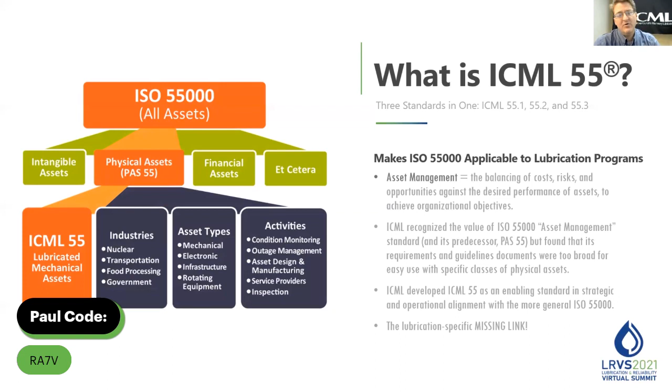So 55.1 is an enabling standard that serves kind of like the missing link between ISO 55000 and your plant's lubrication plan. It replicates the structure of ISO 55001, but focuses the verbiage to what will be practically necessary for lubricated assets.

Well, so at this point, maybe you're asking a few questions like, so what's in it? And is this really meant for do-it-yourselfers, DIY? Why use it at all? Couldn't I just Google for all this? That's the second time I've mentioned Google. And if I decide to proceed with the ICML 55.1 standard, what's next? And these are all important questions because you want return on investment for your purchase, right?

So real quick, ICML 55.1, like I said, patterned after the ISO structure, it's 3 documents. 55.1 is part 1, the requirements document. 55.2 is the guideline document, and 55.3 is going to be the auditor's manual to spell out how an auditor is going to become competent to go out and confirm compliance with the ICML 55.

So as the requirements document, 55.1 spells everything out of what is necessary for organizations to establish, implement, maintain and improve the consistent management of lubricated mechanical assets. Like I said, it's co-authored by a team of 45 experts from all over the world, but most importantly, it defines 12 interrelated areas of a successful, sustainable program.

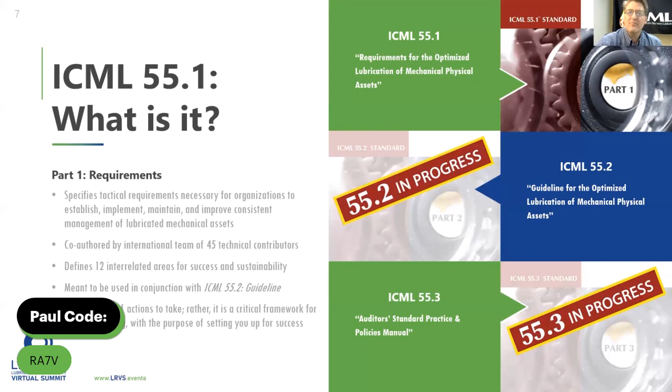Now, it's meant to be used in conjunction with 55.2, the guideline document, but we didn't need to publish them together. That's why 55.1 was published in 2019, because as you'll see here in the next few slides, there's a lot of preparation work that goes into getting everything up to speed at your facility and developing the plan. And then 55.2 will help explain how to implement the plan once it's in place. So it's not really a list of actions to take, but it is a critical framework for decision making. And it's going to set you up for success when it comes time to implement.

So what is 55.1 not? Well, like I said, it's not really an isolated solution. It can partially function that way, but it is really intended eventually to be side by side with the guideline document, ICML 55.2. And of course, it's still an enabling standard, so it's meant to be used as an enabler for ISO pursuits, but it's not meant to replace or compete with ISO documents. Like I said, it's not a how-to manual. It really defines what to do, but 55.2 is the one that really gets more into how to implement.

It's not a substitute for the hiring of certified practitioners. What that means is you're still going to need trained, competent, experienced, knowledgeable, certified people to proceed with this. You can't just hand the 55.1 standard to anybody at your shop and say, here, go forth and do this. You're still going to prefer to have certified people to pull this off.

It's not a mind reader. What that means is that ICML 55.1 is a framework. You still have to do the work to assess your circumstances and identify your priorities and limitations while setting your business goals, whether or not it's part of a larger organizational asset management plan. So that's what you bring to the table, you and your whole team. The book itself doesn't know what your situation is, so it can't tell you exactly what to do. This means, of course, that ICML 55.1 is not a haphazard list of best practices. It is structured with purpose to move you toward successful implementation.

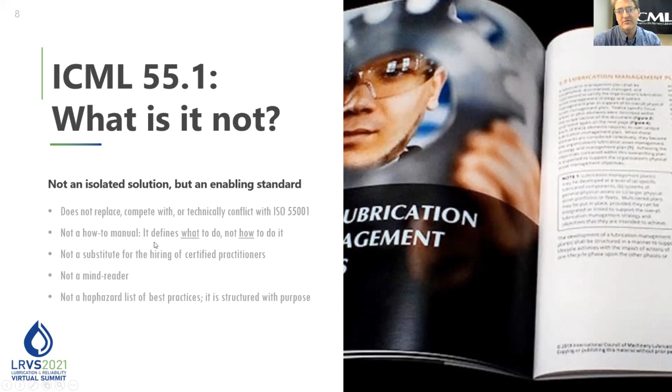So what were those 12 areas I mentioned? Here they are, the meatiest part of the structure. Let's look at all these areas in a little more detail, the attributes of the 12 areas. We don't have time to read through all the topics within the 12 areas. But at a high level, we're pretty much looking at Area 1, skills, that deals with personnel, training, and certifications. Area 2, machine design, accessibility, and use of monitoring technology. Area 3, lubricant design and selection.

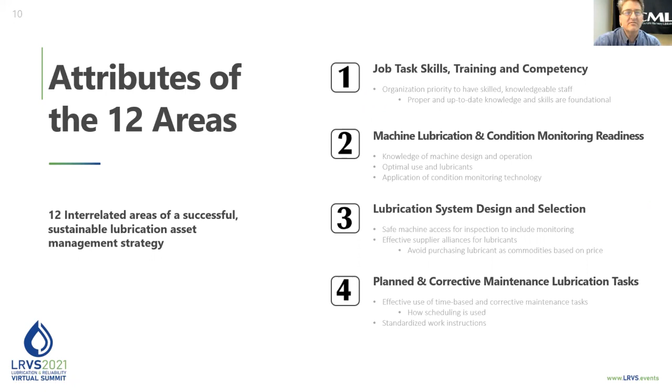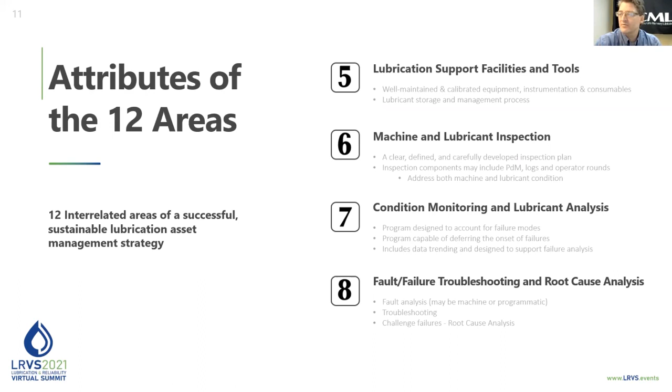Area 4, lubrication schedules and maintenance. Area 5, support facilities and tools. That includes storage like lube rooms and various other materials. Number 6, machine and lubricant inspection. Okay, that's monitoring and access. Number 7, lubricant analysis, kind of self-explanatory. Troubleshooting and root cause analysis procedures. Number 9, waste management, waste handling.

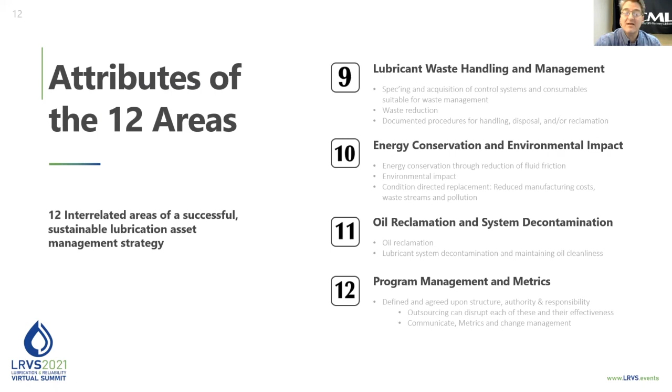Number 10, energy conservation. Number 11, reclamation and decontamination. So we're talking about end of life cycle kind of stuff there. And number 12 is the management of the lube program itself. So there is a lot of information and detail in this standard.

So a natural question is, can't I just Google for all this myself and not buy or follow the ICML 55.1 standard? Well, maybe yes, maybe no. Yes, you can, maybe, but you don't have to. We just happen to think that retracing all these steps would not necessarily be the best way to spend your time and money, right? Even though you can trust everything you read on the internet, right? I mean, really, you can trust everything you read on the internet, right?

Well, ICML is here to support you. So let yourself stand on the shoulders of giants now. The giants are your colleagues from around the world who put all this together for you. They've done all the work for you. No need to reinvent the wheel. No need to do it alone.

But at the same time, no, you really can't just Google all this after all, because the ICML 55.1 is more than just a collection of topics to be addressed. It's already structured to mimic the ISO 55001 as a decision-making tool. So it's already greater than the sum of any parts that you could maybe find on the internet.

Think about it. If you don't know exactly where to start and you don't know where to end, then how would you ever know that you've covered everything you need to be covering? At least with the ICML 55.1, you've got starting and ending parameters that you can work with, and it's structured for that comprehensive assessment and decision-making that leads to successful implementation.

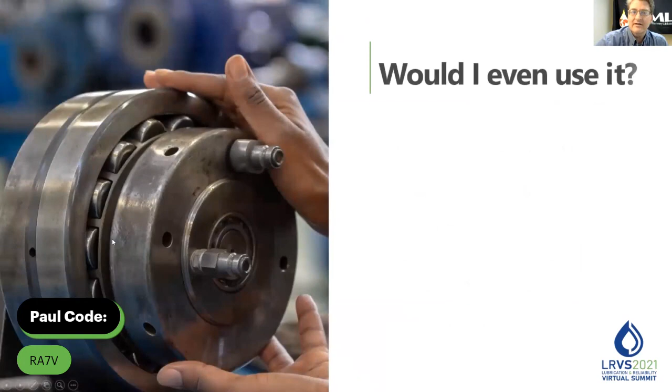Well, this is quite similar. If you decided to go out and Google for what you think is going to be covered in this book, then you're still going to wind up finding this standard on the ICML's website to be exactly what you're looking for. So I tell you what, in actual practice, you never know who's going to maybe benefit from this. The book was written for asset planners and asset practitioners at asset-rich businesses. Most everything's covered. Our website has a list of some of the fluids that are not covered.

But I tell you what, I've talked to certified MLA practitioners at conferences. I really enjoy talking to people at conferences, see what they're doing. And this one gentleman was telling me he was tasked with developing complete lubrication and oil analysis management programs from scratch. He was an MLA2. I mean, talk about pushing the edge of the certification envelope, because the MLA2 certification wasn't necessarily designed for that.

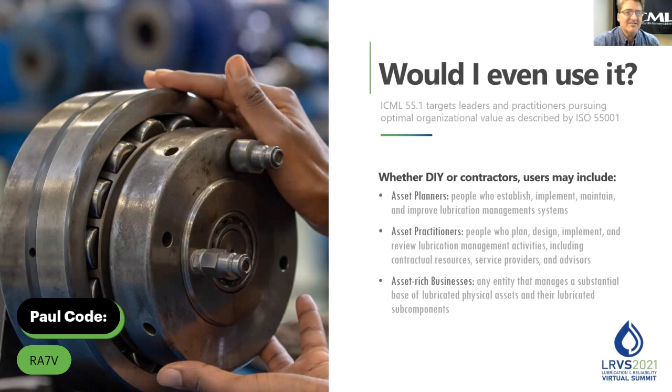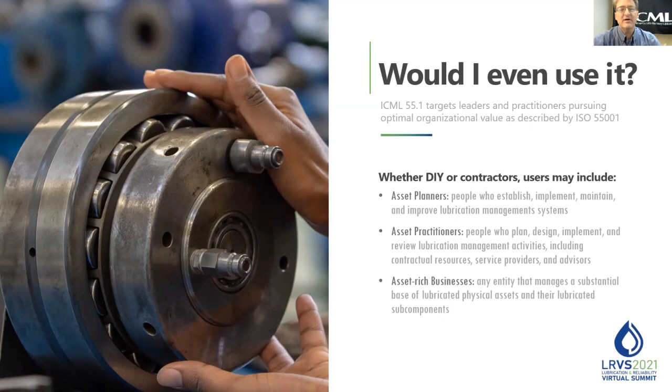He was quite capable, but that's really what the MLE certification is for, the Machinery Lubrication Engineer, which was introduced in 2019. This standard, not to mention the MLE, would have been very helpful to him at the time had it been available. And that's because with the comprehensive instructions and the 12 areas defined in there, it really helps certified practitioners know that they are doing all they could possibly be doing to build or improve their program.

So if you decide to use the standard, and you should, what's next? Well, that question is just kind of open-ended and leads to more questions. How do I define success? What are my goals? What are good and best practices? How is the standard meant to be applied? Why is it written the way it's written? Why is it structured the way it's structured? And in real life, can I get to best possible?

Well, remember I said there are instructions in the standard that explain the approach that you got to take to address all these areas properly in order to achieve success. And that's all at the front part of the book. So keep in mind, though, that once ICML 55 has been fully implemented, your picture of world-class success is most likely going to be different from every other plant's picture of success because your plant is unique.

So let's take a quick look at the process. You're going to start out with an initial self-assessment, figure out what you're doing, and decide what is good at your plant right now. And you're going to do this for each area, by the way. And then you're going to imagine, what if money was no object and we had everything we need and all the people and all the training and everything? What's the ideal dream program that we could be running here? And then you scale back, you consider reality and priorities and scarcity of resources and all that unique to your situation.

And that way you establish what's going to be called best possible. And best possible is what's going to represent success at your plant, because obviously you're going to be careful that you do not exceed what is sustainable while you're defining what is successful.

The plan here, every area gets its own plan, right? It's like a bunch of micro plans. They're all part of one big plan. So the 55.1 standard enables you to define what good looks like and what best possible can look like in each area. And then each area's plan requires you to document specific tasks and actions, specific designation of responsibilities and authorities, to define the skill levels of personnel and the means and timescales for implementation.

And of course, every plan has really got to perform a balancing act of cost, risk, and performance. That kind of goes without saying, and that's mentioned on page 3 of the standard, where, in the instructions part of the book, it talks about all that balancing act and how everything's got to be handled in conjunction with the phases of a system life cycle: the acquisition of components, their use, their maintenance, and then the eventual disposal or renewal.

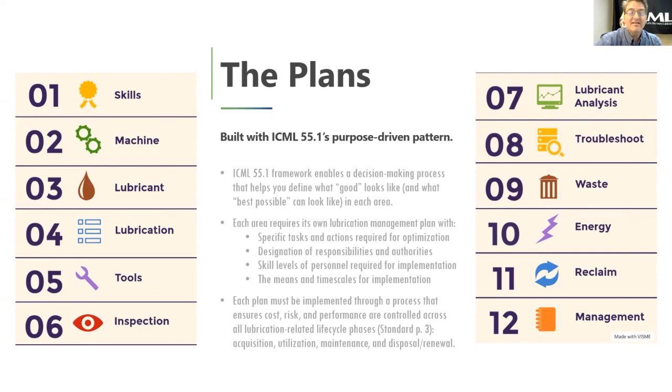So if you've ever gone through the application process for our Gill or Battle Awards, then you already understand that the application questions require you to collect and organize all your program information before you fill out and submit the application, right? Because the application submission would be meaningless without all that prep work that forces you to organize and present your data in a persuasive manner. So developing each area's lubrication management plan here is kind of like that. It requires your assessment and goal setting and prioritization before you ever start implementation. That's what plan means in the Plan, Do, Check, Act, which is on the next slide.

Area 12. Remember I mentioned Area 12 requires you to apply some management to your lube program, and it's continuous improvement. It's key here. This is an integral component of the structure or the pattern I keep talking about. In alignment with ISO 55001, this standard instructs you to establish, implement, and maintain a continuous improvement system in each of the 12 areas. Like the ISO, we employ Plan, Do, Check, Act here. So this helps guide you from what is good to what is best possible in each of the 12 areas.

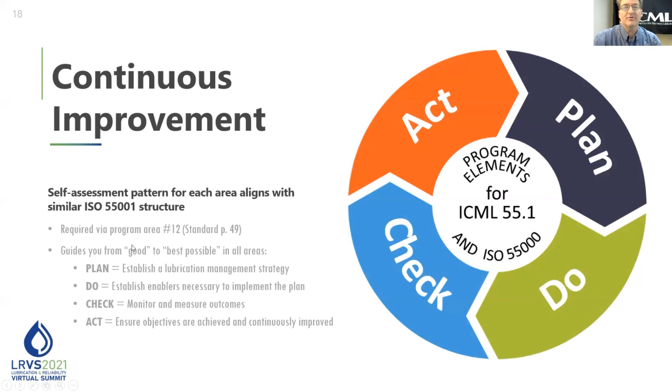So essentially in each area, you'd be in the book and you'd be going, okay, section 4, area 4, let's start with high-level concepts. What are our organizational objectives? And from that, what are the lubricated asset management objectives that support those organizational objectives? And then you apply the ICML 55.1 process to develop the plan. And then you implement the plan with your enablers. And then you assess the plan's performance on a regular basis. You evaluate against the organizational objectives, tweak or adjust as necessary, repeat. Each area, of course, is vulnerable to failure if you don't have a continuous improvement process in place to make them not vulnerable. That's what sustainability is all about.

So let's take a quick look at some key takeaways. Remember, ICML 55, there's no one size fits all. It is not a dictatorial instruction manual. It is purposefully structured for you to apply a process to develop a bespoke plan for your facility. Preparation. As a map, you got to know first where you want to go before you can fully apply the process. So defining success in all 12 areas is key here.

Sustainability requires many things: technical expertise, managerial buy-in, etc. But continuous improvement is vital, more important than solid and consistent activity across the board. And a standardized process eliminates guesswork. The ICML 55.1 defines parameters from start to finish. We believe that the standard's comprehensive and structured framework combine to offer you exactly the support you need to finally stop picking random low-hanging fruit and start pursuing your objectives in an organized, orderly fashion. Because as a standard, it gets everyone on the same page so that you can achieve best possible lubricated asset management that is world-class for your operation.

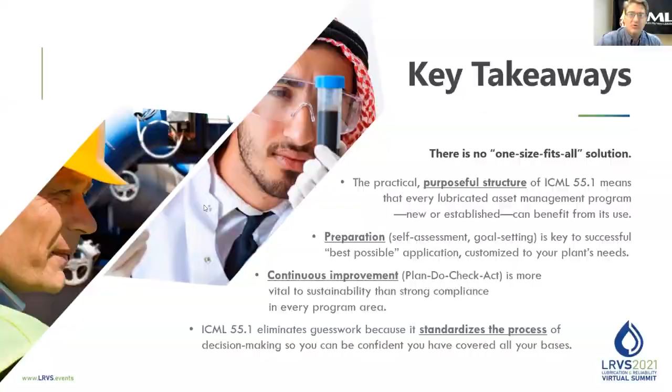So thank you again. I hope this presentation has helped you see and make sense of the valuable practical structure of the ICML 55.1 requirements standard. And I hope that you're inspired to use the standard fully to organize your lubrication program and establish and reach the best possible goals for your asset-rich facility.